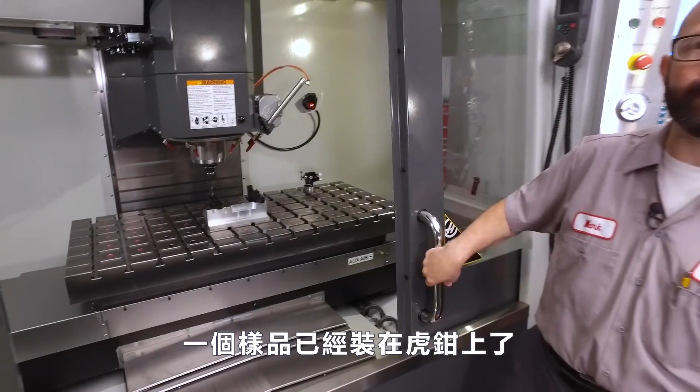Now I have this sample part clamped to the table. We've milled it in half, a cross-section view, so we can see our 4 holes, our 2 clamps, and our 1-inch deep pocket. And we should be all set. It's about time to hit cycle start.

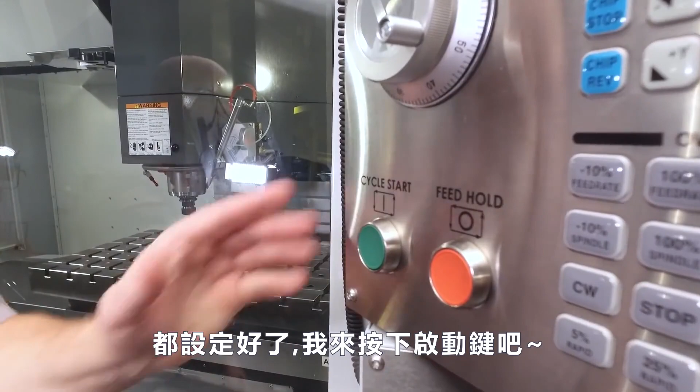Wait, were those clamps there when I wrote the program? Oh, those clamps are fine.

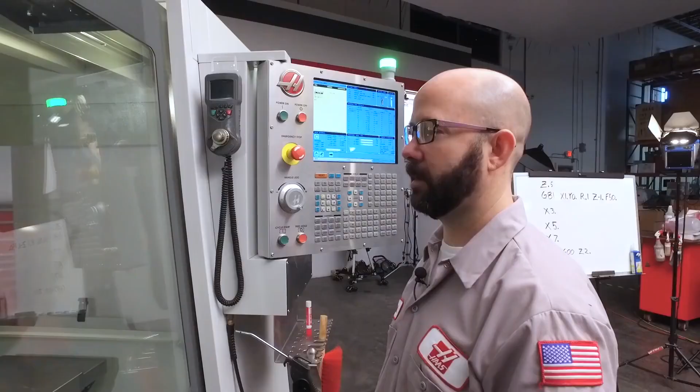Whoa, that was cool. I mean, that was horrible. Clearly, my drill has a problem with those clamps.

Now, we're going to have to program that drill to go up and over the clamps. And to do that, we're going to use a G98 and a G99 code. But before we can fix our clamp problem, we need a basic understanding of our canned cycles. To do this, we're going to unpack the code at the whiteboard.

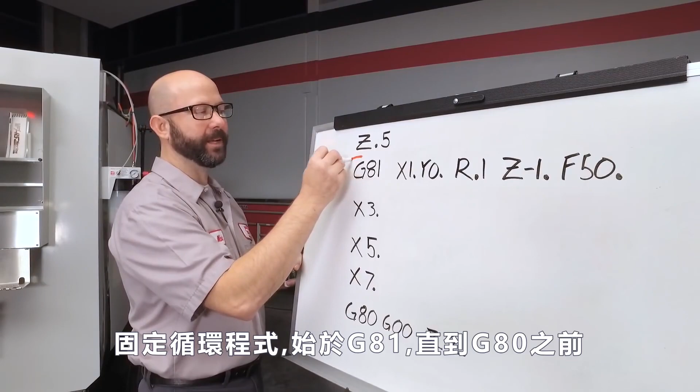Well, here's our program. Now our canned cycle starts with our G81 line and goes all the way until we cancel it with the G80.

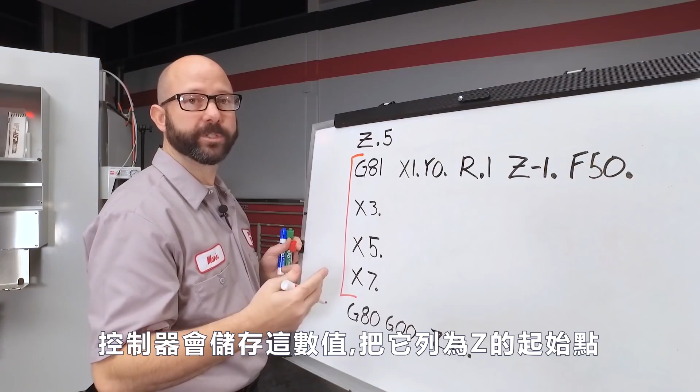Just prior to our canned cycle, we positioned our Z-axis. Now the control is going to store that value as our Z starting position. Just lock that value in your memory for a minute. We'll come right back to it.

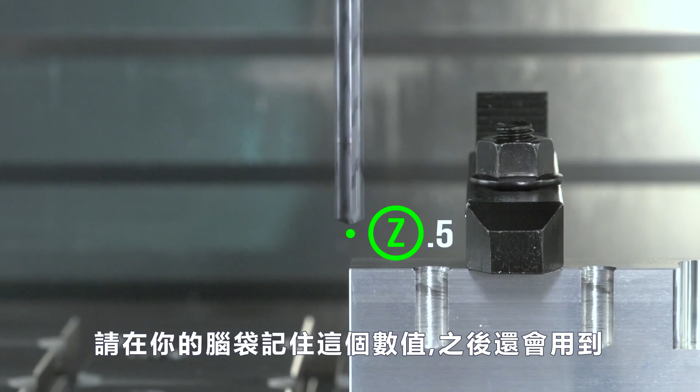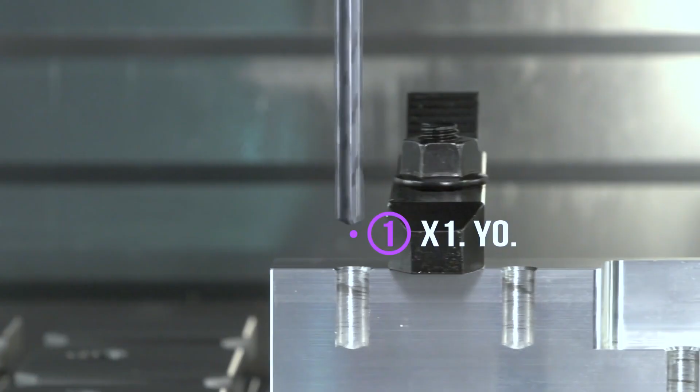With our canned cycles, the control is going to move in 4 very predictable ways. 1, it's going to position our XY location. 2, the tool is going to rapid from the Z value where it was at to our R plane, R.1.

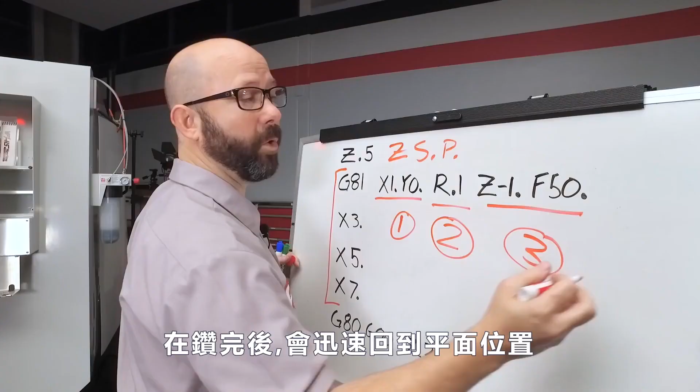3, our tool is going to feed to our Z depth. And after it's drilled the hole, it's going to rapid back up to our clearance plane.

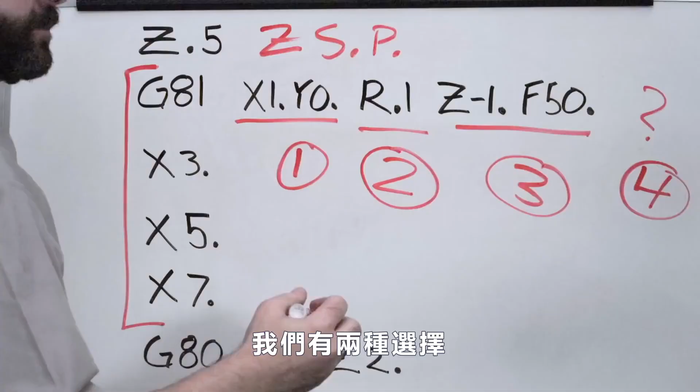But where is this? Well, we have 2 options. We can either use a G98 or a G99.

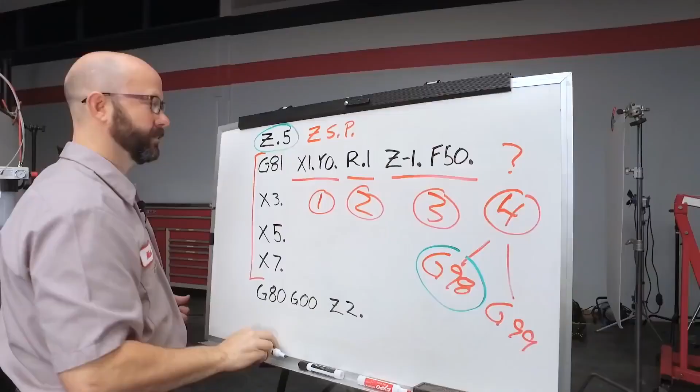Now, if we use a G98, the tool, after it's done drilling the hole, is going to rapid back up to that Z starting position that we talked about earlier. If we use a G99, that tool is going to rapid back to our R plane.

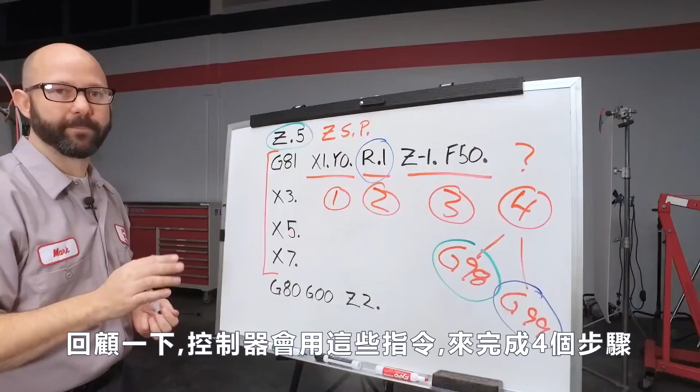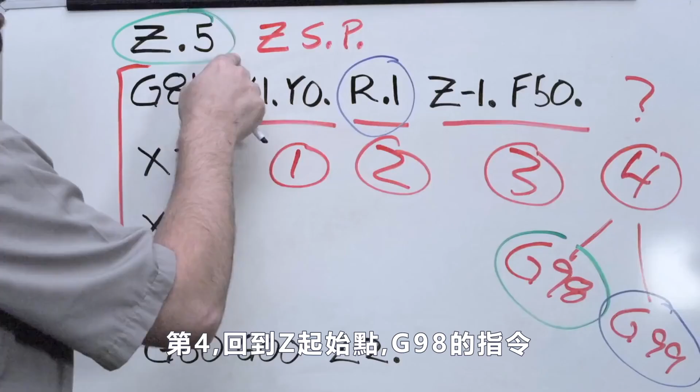To recap, the control is going to use the same order of operations for all these holes. 1, 2, 3, 4. First, it's going to position the XY. Second, it's going to rapid to the R plane. Third, it's going to feed to our Z depth. And fourth, it's going to either rapid back to our Z starting position if a G98 was commanded, or it's going to rapid back to our R plane if a G99 was commanded.

Now it's worth noting that G98 is used by the control by default. So even though we haven't commanded a G98, we're still using it.

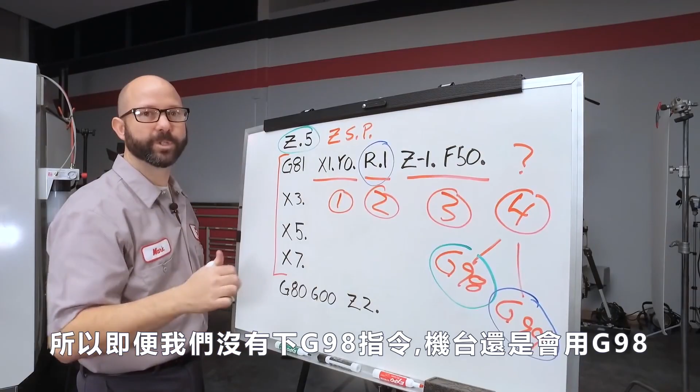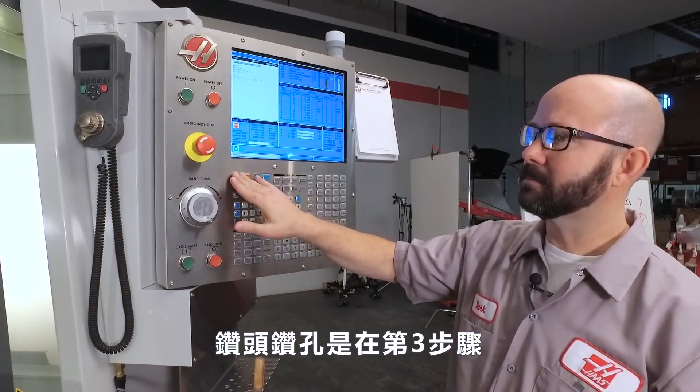Well, now that we've covered the basics of our canned cycles, we can come back and address those clamps. 1, 2, 3, 4. Our drill actually drilled the hole. That was step 3. Step 4, because we were using a G98, means that the tool is going to rapid back to that Z starting position.

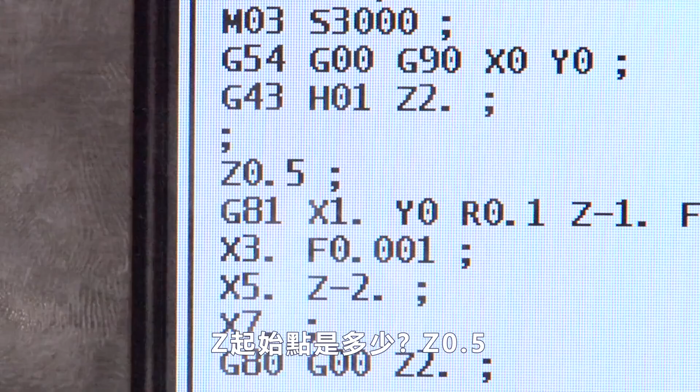What was our Z starting position? Z.5. Wait a second. Our clamps are like 1 inch off the part. That Z starting position isn't high enough. If we change that Z.5 to a Z2.0, our tool should be able to hop up and over.

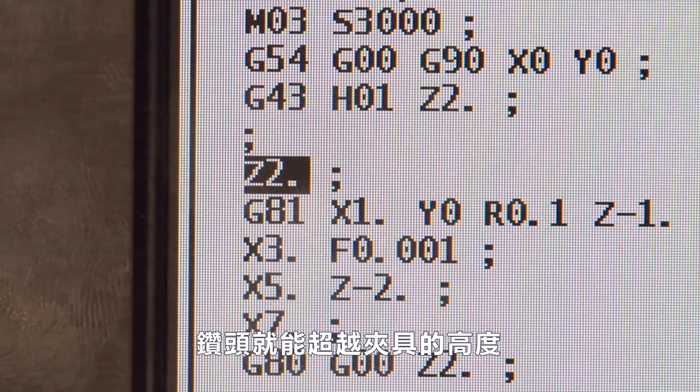Let me change the drill and we'll take a look and see how it does. Well, we've altered our program, and now our tool is hopping up and over our clamps and returns to that same Z2.0 starting position after each drilled hole.

Well, that worked great. We dodged those clamps and we didn't break our tool, but we wasted a lot of time cutting air on those last 2 holes. We're better than that. Well, let's get this program ready for production and tighten up those clearance planes.

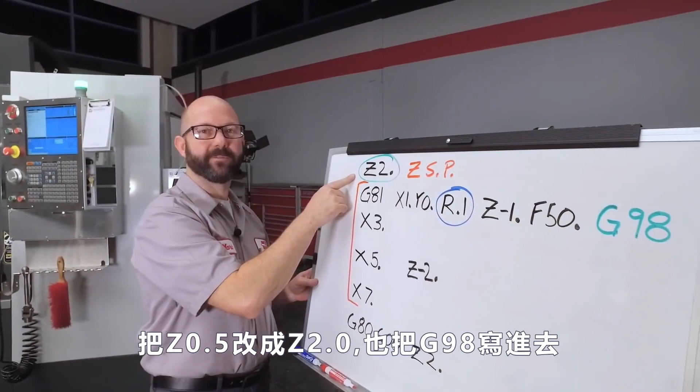Now we've made some changes to our whiteboard. We changed our Z.5 to Z 2-inch, and we also wrote in that implicit G98.

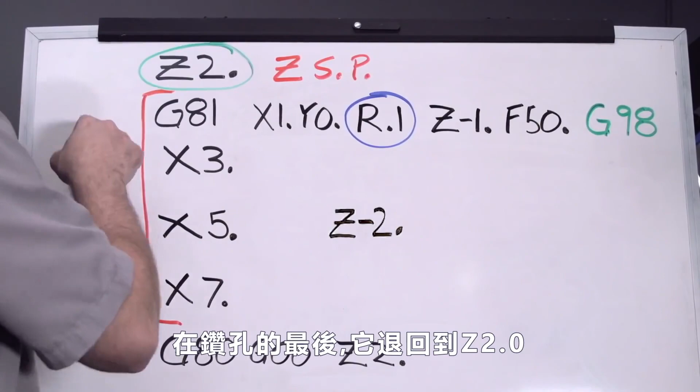The first line here is our first hole. It ran pretty good. At the end of that hole, it retracted 2 inches above the part, which cleared that clamp that was resting in between holes 1 and 2. So now we're ready for hole 2.

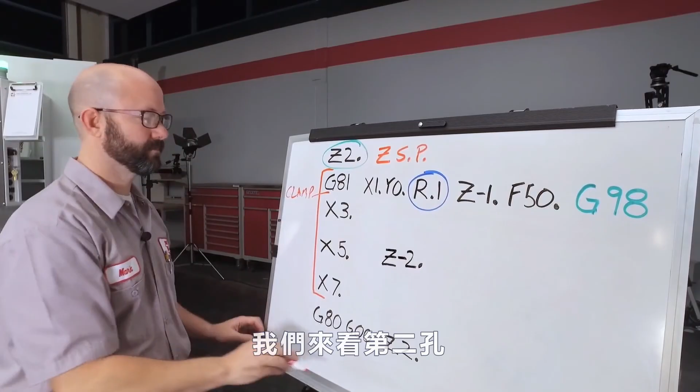Now this second hole is going to go through the same normal order of operations. When it's done drilling the hole, it's going to retract. But there's no longer a reason to go 2 inches above the part. We've already cleared the clamp. So from here on out, we're going to use a G99.

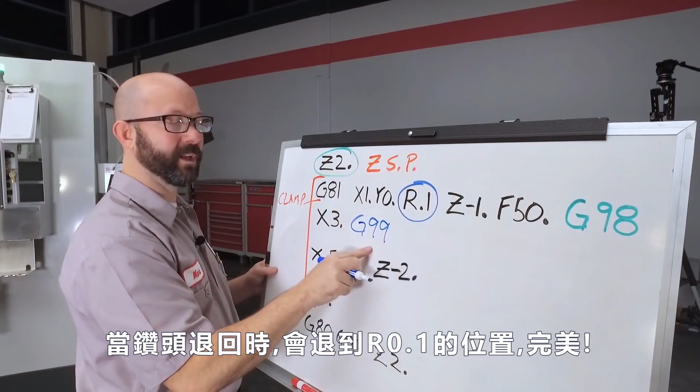When it's done drilling, it's going to retract to this R.1 value. Perfect.

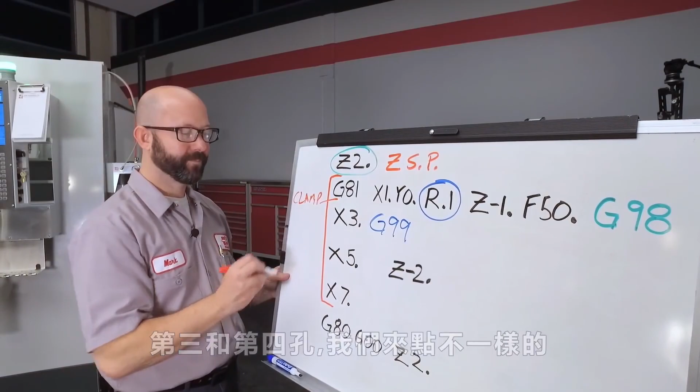For holes 3 and 4, we're going to do something a little different. These holes are special. They're actually sitting at the bottom of a 1-inch deep pocket.

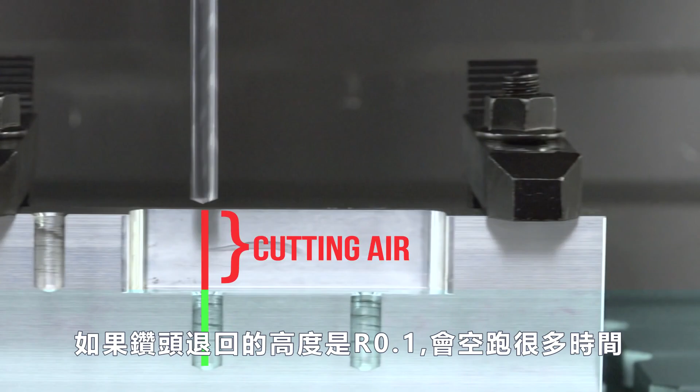If we feed all the way from 0.1 inch above the part, we're going to be cutting a lot of air. So we're going to change our R plane to R minus 0.9. This is going to fit the part perfectly.

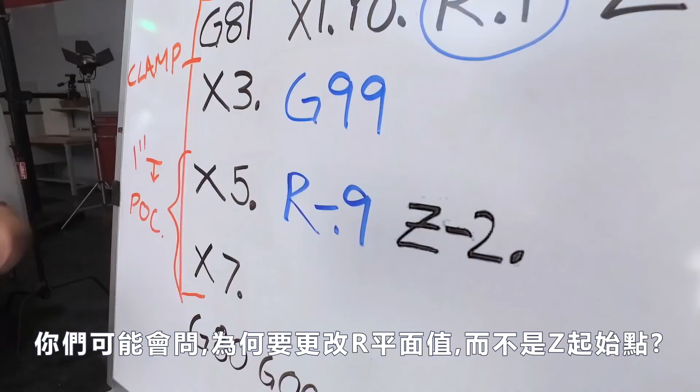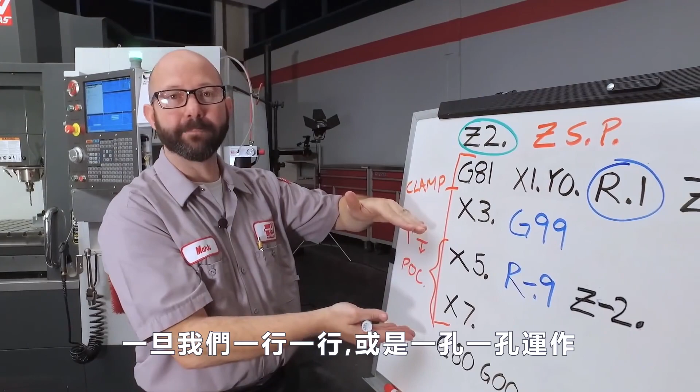Now, some of you might be asking, why did I change my R plane instead of my Z starting position? Well, we can only set our Z start position once per canned cycle, prior to entering that canned cycle. Once we're going line by line, hole by hole, we can only change it from a G98 to a G99 or change our R value.

Let's go ahead and make a change to our code and watch the program run.

So we're using a G98 with a Z start point of 2 inches, so it hops over that first clamp. And then we use an R plane of minus 0.9 for those third and fourth holes, so we avoid cutting air.